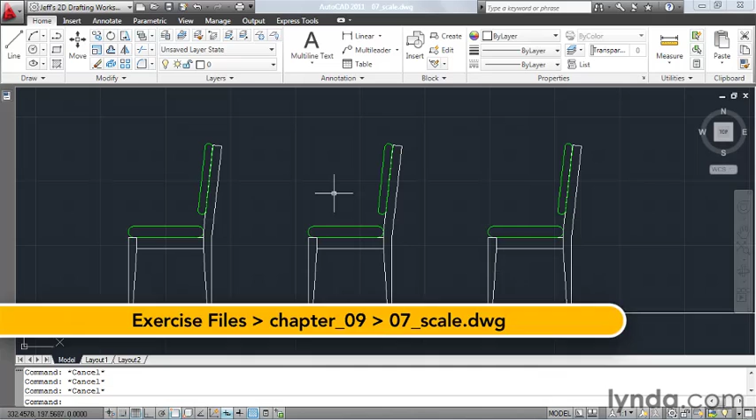If you've ever used a copy machine to make enlargements or reductions of images, you're already familiar with the concept of scale. Just like we can make our images larger or smaller by using a copy machine, we can make our geometry larger or smaller by using the scale command.

On my screen, I have a drawing of 3 chairs. Let's reduce this chair on the left down to half its current size. To do that, I'll use the scale command. Scale is located in the Modify panel of the ribbon. After I launch the command, I'll select the objects I'd like to resize, and then I'll right-click.

Next, I'll select my base point. The base point is the point about which my part is going to get larger or smaller. I'm going to select the end point right here. And notice as I drag my cursor, I get the rubber band effect. At this point, I could free pick a point on screen to resize this geometry, or I could enter a

value. Now, the default value is 1, and 1 represents no change. It's a 1-to-1 scale. To make this geometry half as big, I'm going to use a scale factor of 0.5, and I'll hit enter. Let's make another change. This time I'm going to make this chair on the right twice as big as its current size.

To do that, I'll press the space bar to relaunch the scale command. I will then select the objects I'd like to resize and right-click. Then I'll choose my base point. I'm going to select the end point right here this time. Notice that the base point is the only part of the object that doesn't move. By choosing my base point at the end of this leg, I can ensure that my chair will always remain sitting on this horizontal line.

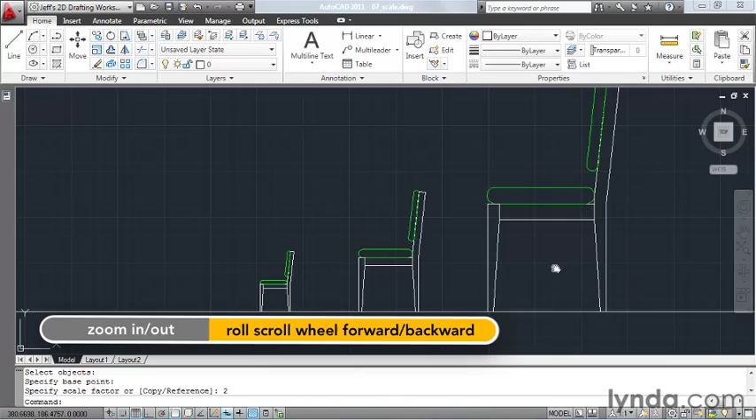Now, to make this chair twice as big, I'm going to use a scale factor of 2, and I'll hit enter. As you can see, the scale command can make quick work out of design changes. The scale command also comes in handy if we have trouble with our drawing units. Let's look at an example.

I'm going to close this drawing. I won't save changes. And then I'll move up and click the Open icon. We'll look inside the Exercise Files folder, and go inside the Chapter 9 directory. And I'd like to open these 2 drawings. I'll select Racket, and then I'll hold my Shift key, and I'll select Court, and then I'll click Open. This opens both drawings in my interface.

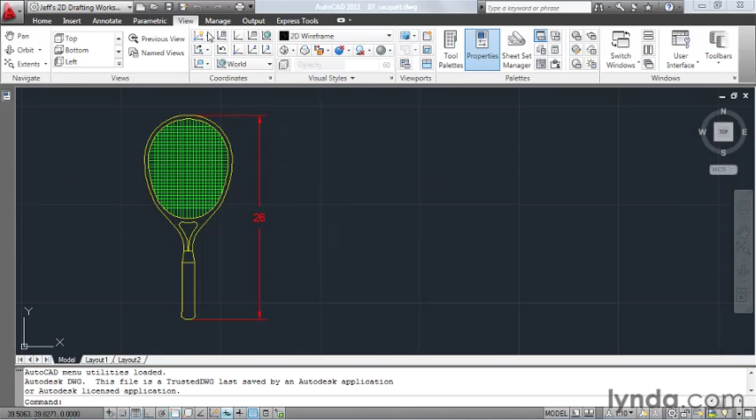And now that they're both open, I'd like to view them side by side. To do that, I'll click the View tab, then I'll come down to the Windows panel, and I'll select Tile Vertically. All right, let's clean up our screen a little bit. Currently, the focus is on this drawing on the left, so I'm going to pan this over and center it a little bit better. Then I'll click in this window to put the focus over here. I'll zoom out a little bit, and I'll pan this drawing over.

Now, this drawing on the right represents a standard tennis court, and this drawing was created such that each unit equals 1 foot. Let's verify that quickly. I'll open up the application menu. I'll come over to Drawing Utilities, and I'll select Units. We can see that right there. Each unit equals 1 foot. Let's click OK. Now I'll click in this drawing on the left. We'll take a look at this one.

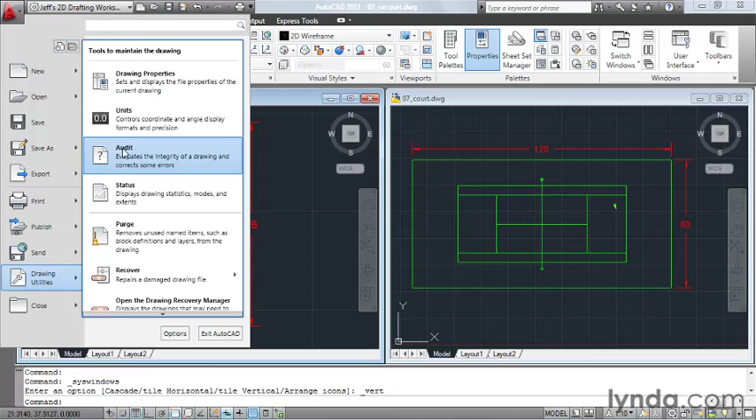This drawing represents a standard tennis racket, and this drawing was created such that each unit equals 1 inch. Once again, we'll verify that quickly. We can see that right there. I'm going to click to select this geometry, and then I'll click and hold on a highlighted portion, and I'll drag this into the other drawing. And notice the problem. The tennis racket is huge.

You see, AutoCAD only sees units. In this drawing, the racket measured 26. Well, that 26 represented 26 inches. When the racket came over, it still measures 26, except in this drawing, it's 26 feet, which is 12 times larger than it needs to be. To correct this geometry, I'm going to use the Scale command.

So I'm going to jump back to the Home tab. I'll launch Scale, and I'll select my racket and right-click. I will use the endpoint down here for my base point. And for my scale factor, I'm going to type 1/12, and I'll hit enter.

Then I'll launch the Move command, and I'll select my racket and right-click. I'll pick it up from any endpoint, and then I'll zoom over on the right side of the drawing because I have another racket over here, and I'll click and place my scaled racket right next to it. And as you can see, the geometry is now appropriately sized for this drawing.

Whether we need to resize our entities as part of a design change or to correct a difference in drawing units, we can accurately make our geometry larger or smaller by using the Scale command.